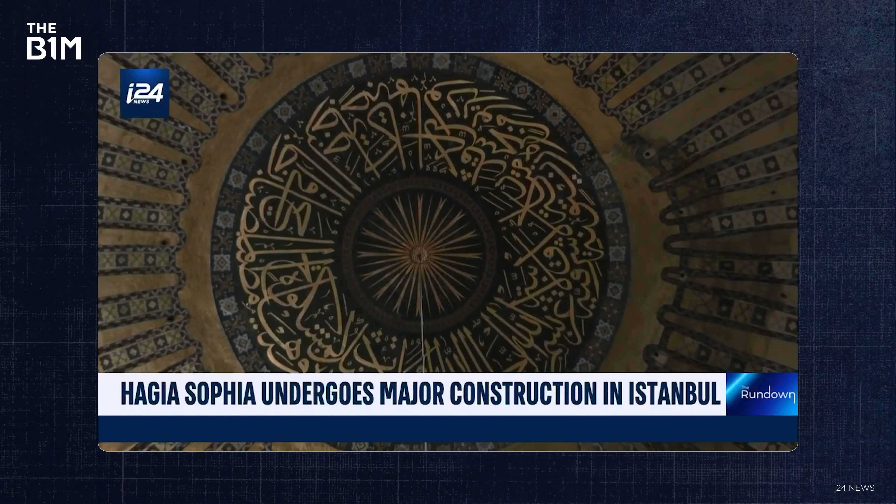And while it survived a lot during the last millennium and a half, the damage that has built up over the centuries is now seriously starting to show, which is why one of our planet's most historic buildings is going through one of the biggest and most important upgrades of its long and eventful life. This project is fusing the engineering and construction genius of the past with the technological tools of the modern age. Without it, this marvel of the ancient world could become ancient history.

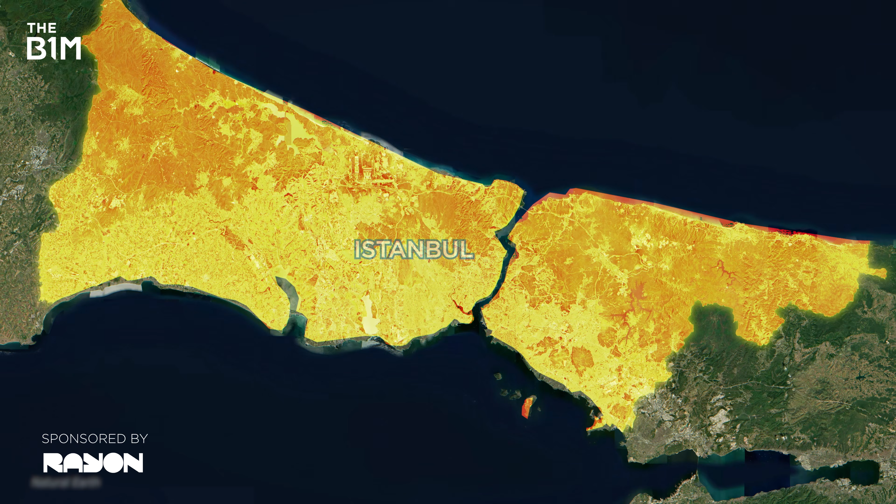There's nowhere else like Istanbul, the only major city in the world that straddles two continents divided by the Bosphorus Strait. And overlooking this busiest of waterways is Istanbul's most iconic landmark, the majestic Hagia Sophia. The name means holy wisdom in ancient Greek, which gives you a real sense of just how old and globally significant this building is.

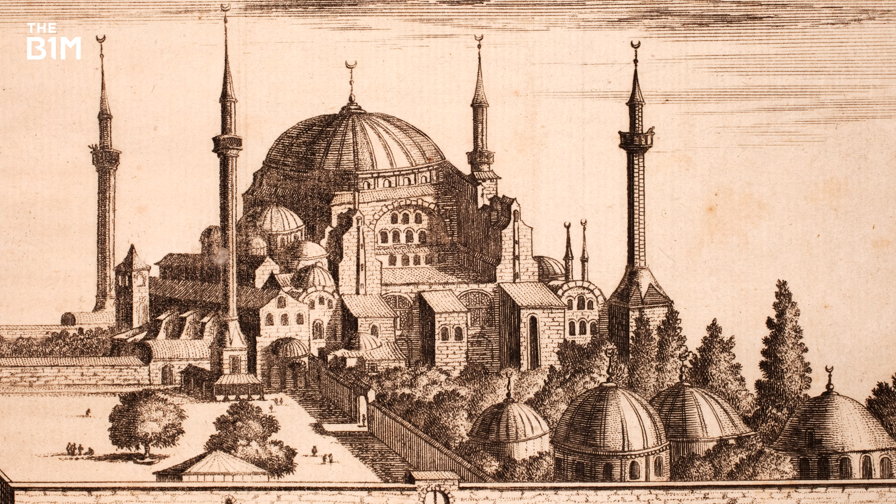Angkor Wat, the Tower of London, Notre Dame, the Vikings, all of them came after Hagia Sophia. But go and stand outside it today and you might wonder what all the fuss is about, because it's virtually disappeared underneath a mountain of scaffolding.

We're going to come on to why that's had to happen very soon, but to really understand this building's present and where it's heading in the future, you first got to get to grips with its extraordinary past. Many people put this building up there with the pyramids, the Colosseum, and the Great Wall of China as one of the greatest structures ever built.

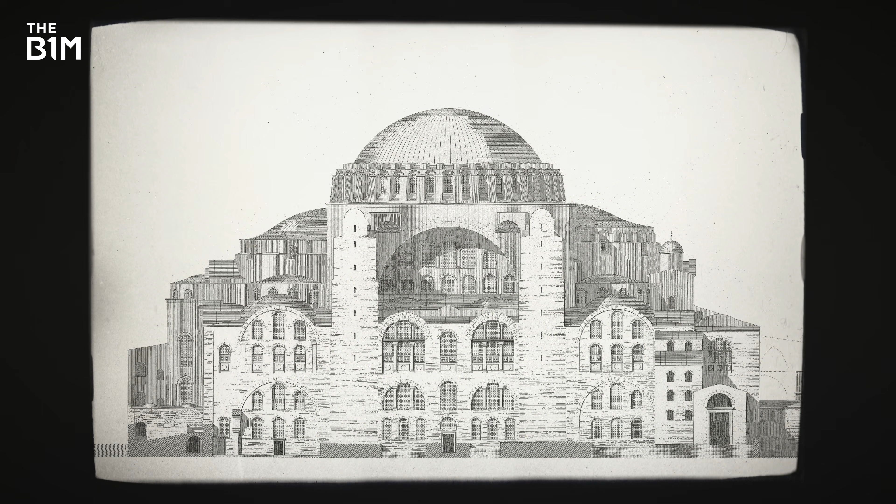Finished in 537 AD, it was the main cathedral of Constantinople for over 9 centuries. Constantinople being the former name of Istanbul, when it was the capital of the Eastern Roman or Byzantine Empire.

It was so spectacular, Emperor Justinian I, who commissioned it, is thought to have shouted, 'Solomon, I have surpassed thee,' upon its completion. He was talking about King Solomon and his temple, which, if you know your scriptures, is a major flex. Justinianus tried to show his power to the public. That's why he started a very big project. It's all politics, as today.

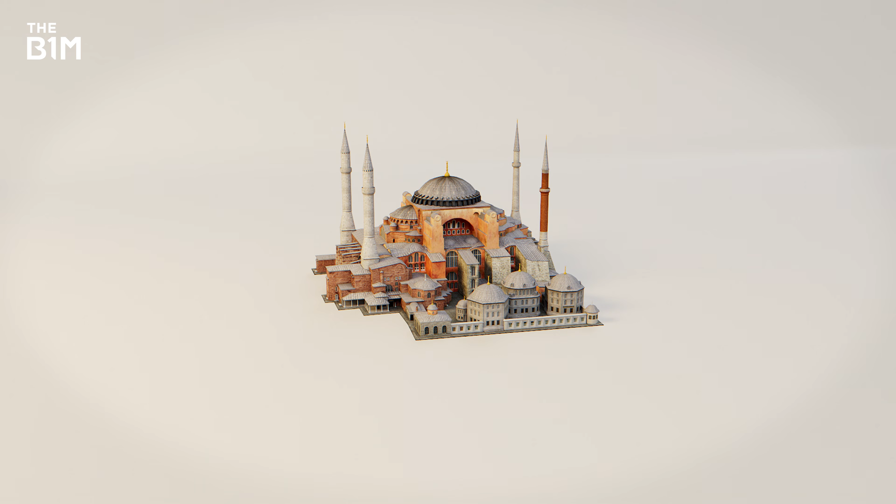The structure of Hagia Sophia took only 5 years. He wanted to build a very big, very impressive building in a very short time. But like any big thinker, Justinianus didn't let his need for speed stop him from having grand ambitions.

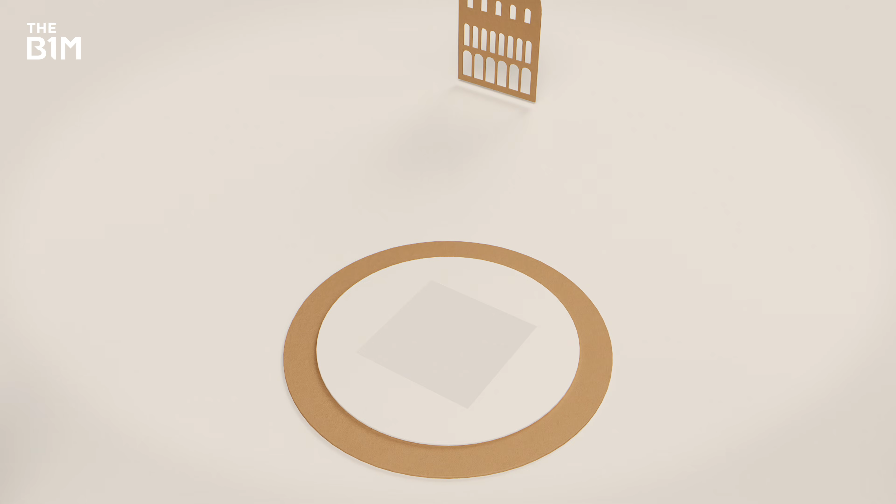The central dome, with a 31-metre diameter, was designed to give the impression that it was floating above the floor. And it would have been successful in its illusion, because this is when a certain building innovation was used for the very first time. They're called pendentives.

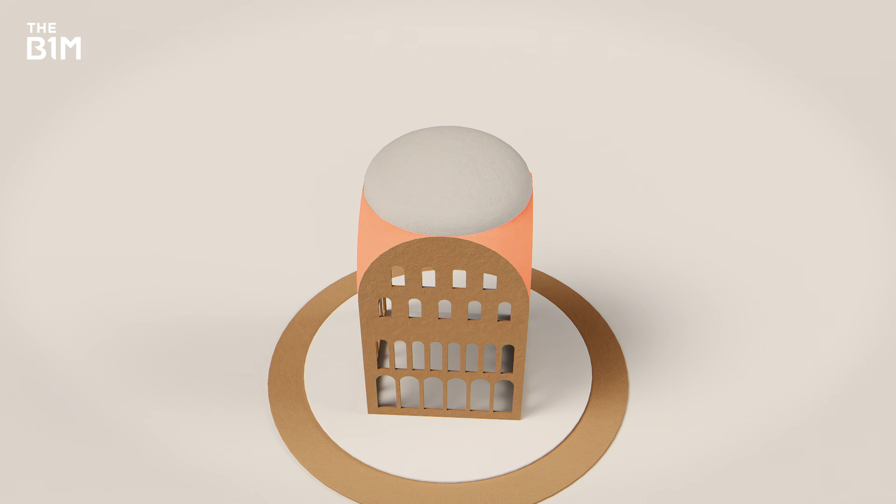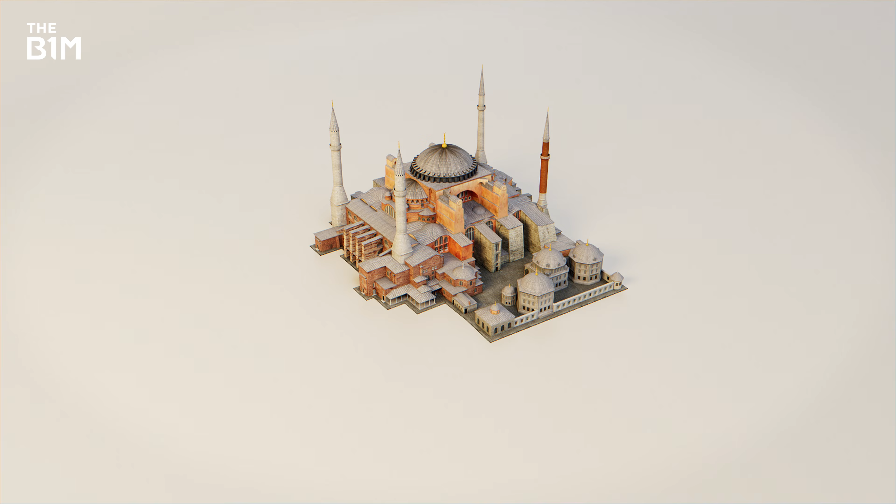It's where 4 curved triangular segments are placed at the top of a square base to create a circular dome. But with so much vertical force pushing downwards and lateral thrust pushing outwards, the dome needed additional support. That's why they built the main dome with 2 half domes, because they were supposed to use 4 half domes to support the building. But when you use 4 half domes, you need 4 giant pillars and they dominate the building. Set to the east and west of the main dome, these semi-domes help to channel some of the weight

and thrust down to the arches, piers and foundations. The buttresses on the north and south sides do a similar job. And yet, there's much more to this building than just its most prominent feature.

You see, while Hagia Sophia isn't technically considered one of the ancient wonders of the world, only the Great Pyramid remains from that list, take a look at these. A set of 8 green marble columns brought in to support the arches and galleries, or upper floors, of the cathedral.

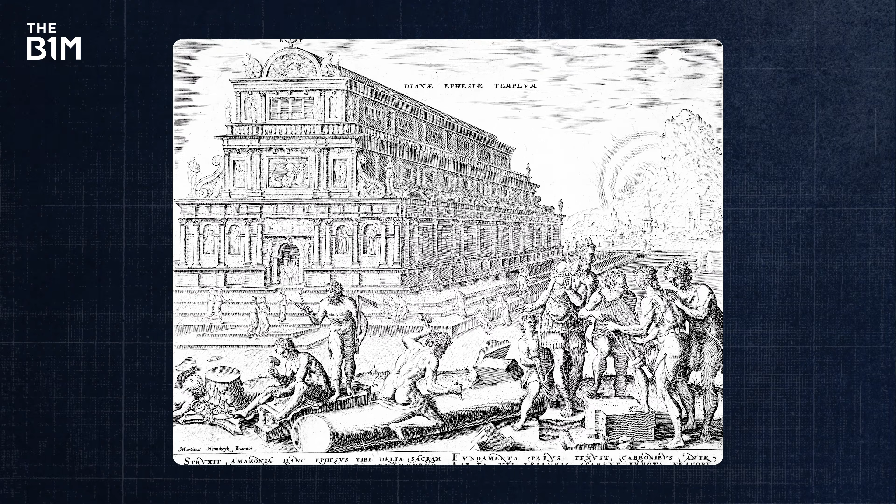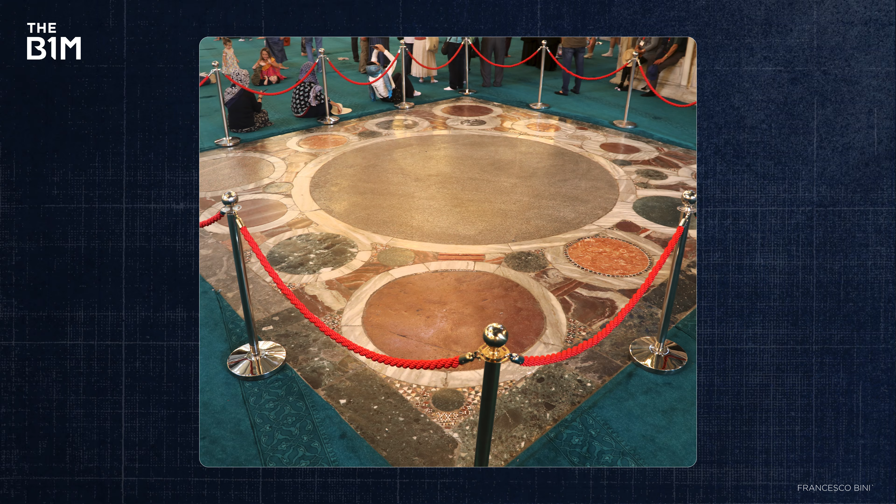They're believed to have been recycled from the Temple of Artemis, one of the ancient wonders. Meanwhile, this red stone set into the floor could only be found in Egypt's eastern desert. You'll find it in the Omphalion, the site where emperors were crowned for hundreds of years. Meanwhile, the yellow stone found in the decorative wall coatings came from Syria. Marble was shipped from what is now Tunisia and Algeria. In other words, the materials here were sourced from far and wide.

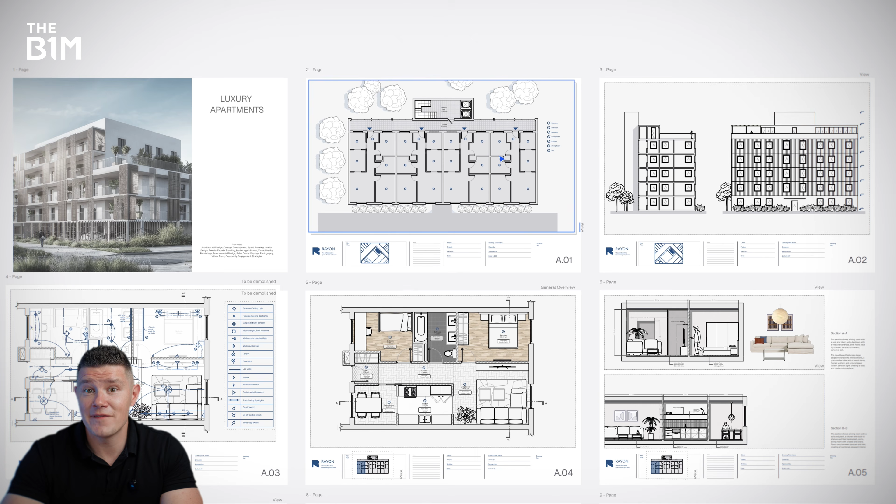Now, I don't know about you, but all these glorious shots of Istanbul have got me thinking that it might be the perfect city to settle down in. Just imagine waking up to stunning views over the Bosphorus, and who knows, maybe the Hagia Sophia itself. I could definitely get used to that. In fact, I'm so sold on the idea that I've gone ahead and designed my own apartment, a penthouse obviously, all for when I'm ready to make my move.

Now, it's time to enter the next chapter in the extraordinary story of this building.

Now, while the Hagia Sophia goes to show what people in power were capable of, even way back in history, it's nothing compared to the power of nature. Big earthquakes happened in several cities close to Istanbul, like the earthquake in '99. It happened to another city, but it affected Istanbul a lot. But natural disasters are hardly a problem exclusive to the modern era, are they? The architects of the Hagia Sophia wouldn't have known they were working close to a fault zone, and in fact big earthquakes were recorded in what is now modern-day Greece, Italy and Turkey around the same time that this building was starting out.

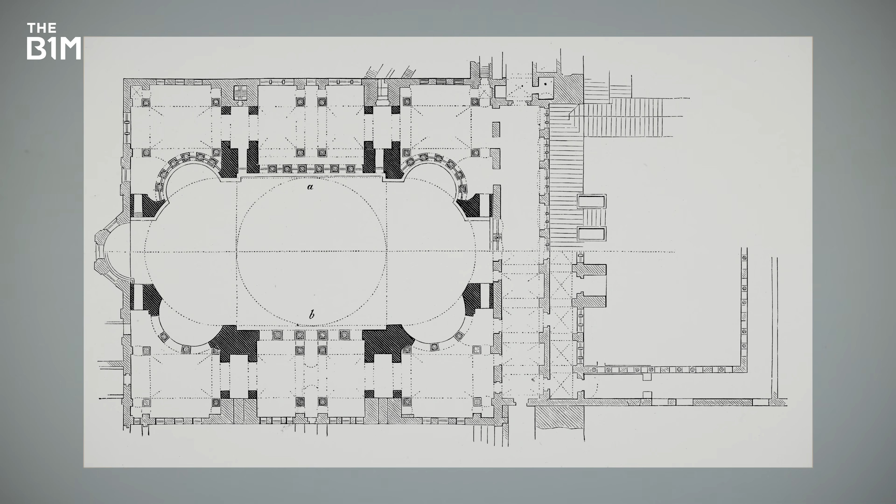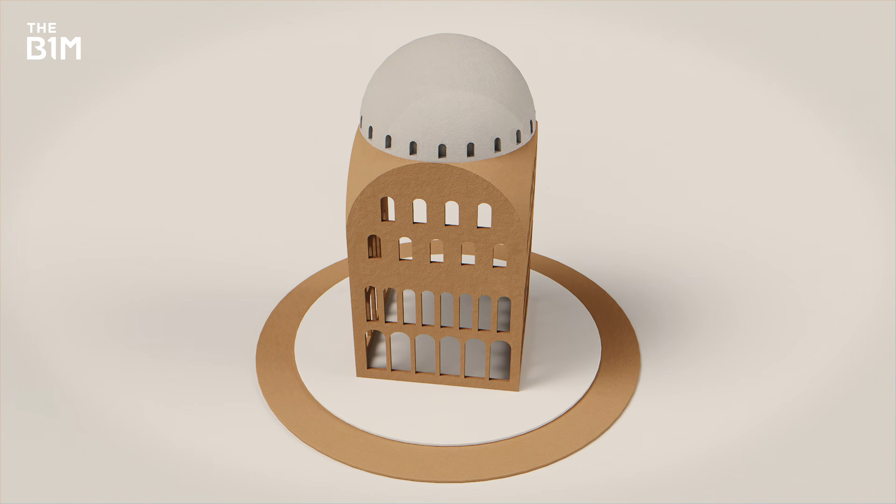It explains why there were some complications in what was actually the third attempt to build this place. Just over 20 years after completion, in the year 558, the now iconic dome collapsed. It had fallen victim to one of these earthquakes, but not only that, engineers realised it had been built too shallow. You see, even with those pendentives, loads were being transferred to the walls, which caused the supporting structures to crack, shift and weaken. Adding more lateral forces, like the ones you get in an earthquake, proved to be the final straw. So the dome was rebuilt with a higher crown, or apex, and a series of ribs, ensuring forces were distributed straight to the structural supports instead.

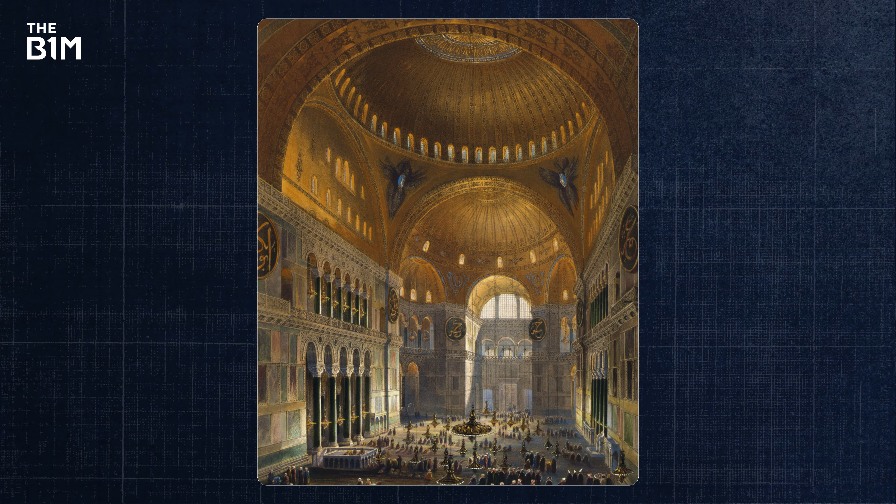But there was more trouble to come. Once rebuilt, the dome suffered further partial collapses in both the 10th and 14th centuries, often caused by earthquakes. But the dome you see today has actually been there since the 15th century, some 600 years ago. That's when Constantinople fell to the Ottoman Empire and the Hagia Sophia was converted from a church to a mosque. As you might imagine, that led to several changes. For example, many of the Christian mosaics were covered up or plastered over before being rediscovered much later.

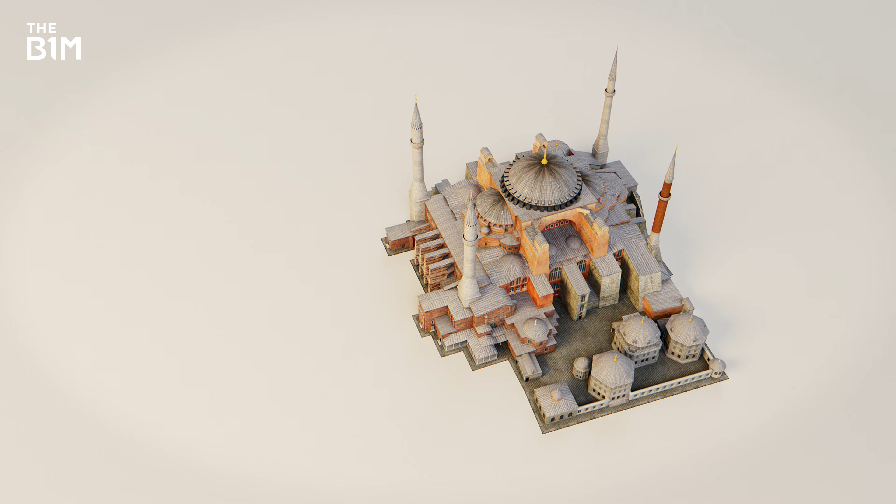This was when those towering minarets, which are used to recite the call to prayer, were constructed. The first two were built shortly after the conquest, but the others were added a century later, and not just for religious reasons. When the city was conquered by the Ottomans, the building was not in good condition. In the 16th century, there was a big problem. The building was about to collapse, so Mimar Sinan, the most famous architect in our history, added 2 more minarets. When you look at the minaret base, they are huge, much bigger than other minaret bases, because each minaret is a buttress. So they're actually supporting the building.

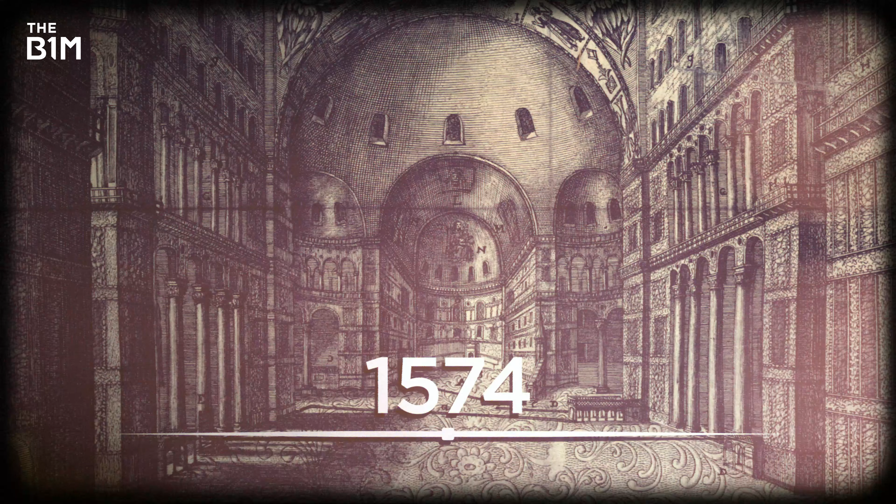After that, the next 400 years or so passed without too much drama, well, for Hagia Sophia at least. That was until the mid-1930s, when this city once again found itself adapting to a completely new regime. A decade earlier, the Ottomans had been overthrown, and the Republic of Turkey was born with a series of secular reforms. Modern Turkey, strong and stable, was created out of a dying Oriental despotism by one man, unique in history.

Founding father Mustafa Kemal Ataturk wanted to show the world his new country didn't favour any particular religion. As proof of this, Hagia Sophia was turned into a museum, so people from all walks of life could sample its unique history. Christian mosaics that had been hidden for centuries were uncovered and displayed next to the Islamic calligraphy of later centuries. Nowhere else would you find so much iconography from both of the world's biggest religions in the same building. But there was to be one more transformation as the Hagia Sophia entered the decade we're currently in.

In 2020, President Erdogan reversed the 1934 decree and the building became a mosque again. It means the main floor is now exclusively for Islamic worship, while the galleries above are open to non-Muslims.

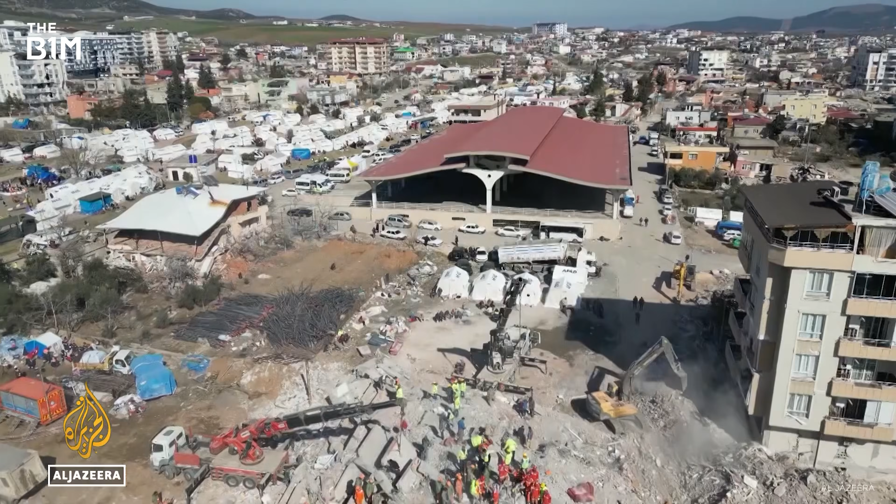The impact was devastating for the Turkish people, with the most severe destruction seen in the southeast and centre of the country. Although situated away from the worst-hit areas, a multi-year plan was drawn up to address the centuries-old fatigue in the structure of Hagia Sophia, and to make sure it's ready in case the next disaster hits closer to home. Two years later, work on reinforcing the building began, and immediately the complexity of this project would have been staring the restoration team in the face, because they didn't yet know what state the dome was in.

So the first job was literally to make a series of openings allowing them to see inside. They discovered that over time, and after previous collapses, extra material had been added in to give the dome its round-ish shape, which means that technically it's no longer actually a perfect circle. More importantly, these interventions made the dome heavier than it should be.

We opened 24 spaces symmetrically above the dome. During this study, we can say that it has 3 parts from different centuries. In some places, they cannot fit each other correctly. It has been filled with soil and some wooden beams in order to make it roundish, so they added extra loads to the dome. One of the aims is to remove the extra loads, make it lighter.

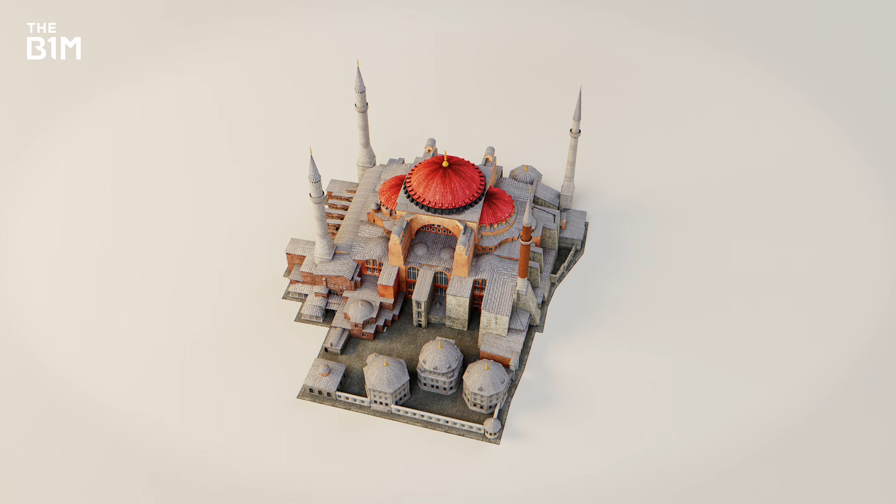Above this, the team discovered that the lead coverings on the main and semi-domes are now worn and damaged, so they're being replaced, which will help to strengthen the system that supports them. Because this will open up part of the roof, the dome is being shrouded by a steel structure to protect it from the elements, as well as to prevent damage to the inside of the building, including the historic artwork, which has already been experiencing centuries of wear and tear.

We took a decision to make a great scaffolding to keep the main dome from the outer weather effects. A rain of half an hour can damage not only the dome itself, we also need to preserve the mosaics beneath it. So we had to be very careful.

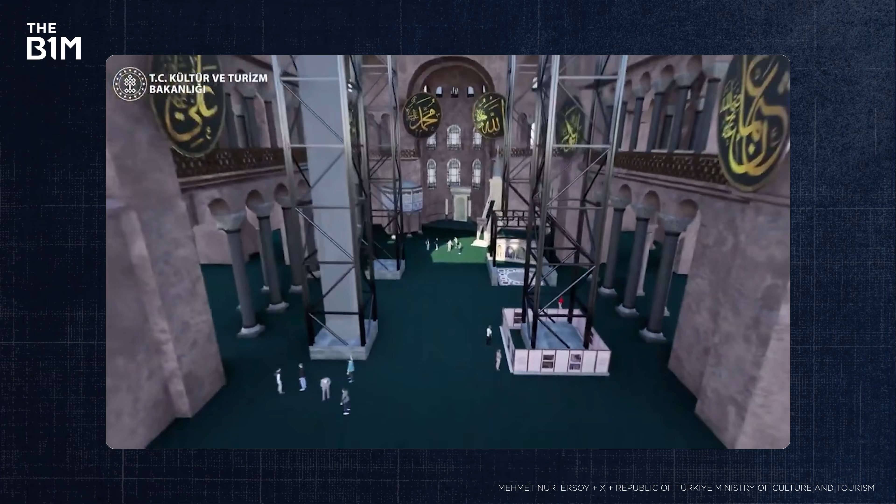To support the steel structure and prevent it from adding more weight to the dome, while giving workers access to the inner side, four large piers were installed underneath. Although pretty hard to miss, these towers have actually been carefully arranged so they don't get in the way of worshippers.

It's important to recognise this restoration is about much more than just the dome. There is loads to do here. They're also restoring the floor, columns, and mosaics. The marble floor has damage. The marble floor of the upper gallery was restored before it was opened to the public as a museum.

They're going to do the same thing on the ground floor. A lot of effort has gone into being as non-intrusive as possible with the restoration. After all, this is an active place of worship and a UNESCO World Heritage Site. But still, the methods used to bring in heavy materials has created some concern.

Trucks and cranes were driven right inside for the first time ever, onto a surface that was built centuries before these vehicles even existed. In other words, that floor wasn't originally designed to carry this sort of weight, so you can understand why people were a bit concerned.

Thankfully, Hassan and his colleagues made preparations beforehand. They tested the soil, commissioned radar scans, and undertook load calculations before constructing a special platform to support the weight of the trucks.

There is a multi-layered temporary floor before the cranes get inside. There are many layers—initially sand to a thickness of 10 centimeters, and then very different kinds of membranes, wooden floors, etc. You can imagine how stressful that must have been for the team. Despite all those calculations and preparations, you never know until the truck properly drives in, and there must have been some nerves about what would happen if something didn't go to plan at that point.

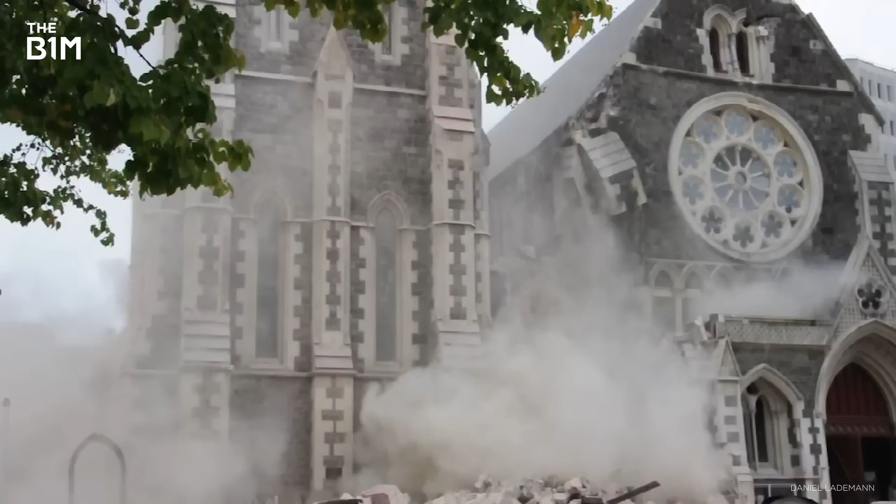Because if it isn't completed, who knows what the end result might be. We've seen how incidents like the fire at Notre Dame in Paris and the collapse of Christchurch Cathedral in New Zealand caused heartbreak around the world. Should Hagia Sophia find itself in a similar situation after managing to stand firm for so long, the response would be truly seismic.

It's why projects like these are so important—restorations that prevent disasters like the ones we saw in France and New Zealand. Too often, we find ourselves mourning the loss of great buildings, wishing we hadn't left things so late. There are not a lot of buildings still standing that old.

Whenever I go into Hagia Sophia, I feel every inch of the building is precious. It's a common heritage. It is humankind's heritage. It is the heritage of two very important religions. That's why we have to handle it carefully, very carefully.